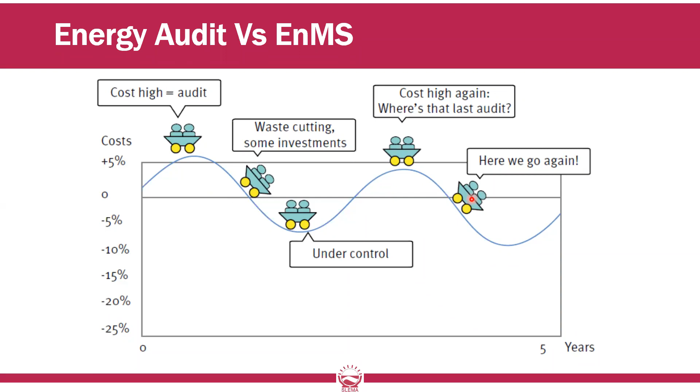Then if we see ENMS, energy management system, the start will be the same. So whenever they feel their industry is energy intensive and they pay a lot of money for energy, they start with what we call energy review, energy planning. That is different. We'll discuss later. That is a little bit different compared to an energy audit.

Then all given activities and recommendations are categorized depending on the investment and business priority for implementation. They implement selected activities. Then those are followed by monitoring and evaluation, so they will not lose the intended outcomes of implementation.

So they can improve their system continually. In the first 1 or 2 years they can implement low cost, no cost measures, then they go for high level investments, and later those things are done with the support of other internal departments like the HR department, procurement department, design, engineering, maintenance.

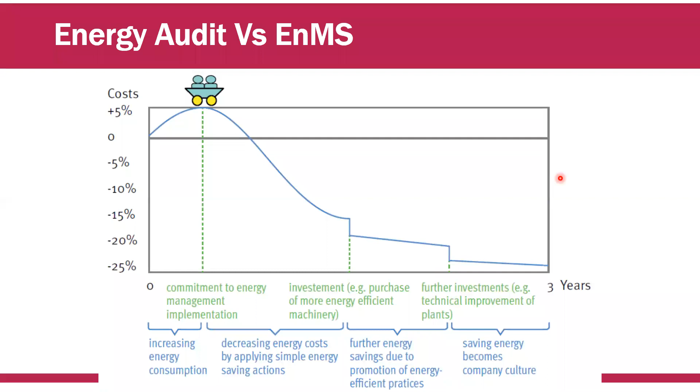That is continual improvement, and that is the difference between the ad hoc approach and continual improvement, which is supported by ENMS. And if we see the entire 50,000 family in a single picture, we are focusing on this 50001.

That is the document giving all requirements and guidelines for the energy management system, and it is supported by other documents like 50002, requirements and guidelines for energy audit, 50003 for application, 50006 for baseline, 50015 for measurement and verification. Likewise there are other supportive documents, but we are mainly focusing on the ISO 50001:2018 document. Within 10 minutes we will go through the entire document and see the main clauses and requirements.

Same as many other ISO systems, it follows the same clause structure, 10 main clauses, starting from scope and normative references, terms and definitions. These first three are basic formalities. Scope describes the scope of the ENMS document. Normative references: in ENMS, we don't have content in this chapter.

Terms and definitions: all terms and words used in ENMS are described and explained, because here we can see some differences compared to normal day-to-day wording. Energy use, energy consumption, energy performance indicators, significant energy users, variables, static factors are described a little differently. Then from chapter 4 the real system content starts, and continues to chapter 10.

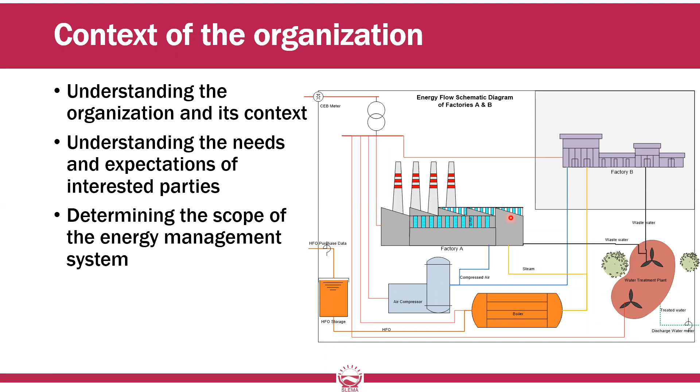And then the leadership. We can say compared to 2011, because ISO 50001 first release occurred in 2011 and the revision was released in 2018. Compared to the 2011 version, here we can see more weight to leadership. The commitment from the leadership is highlighted more than the 2011 version, and more responsibilities are given to leadership.

Because without commitment of the top management or leadership, we cannot continue, because these are long-term system implementations and take time to implement and also take time to stabilize. So continual support from top management is much needed. Support may be by means of providing required resources and giving authorities, likewise.

So that commitment can be demonstrated by publishing an energy policy for the company. That is the base foundation of the system. Then defining the energy management team and giving clear responsibilities to each and every team member. In such a way leaders can demonstrate their commitment, and that demonstration should be documented, and all required documentations are mentioned in the system document.

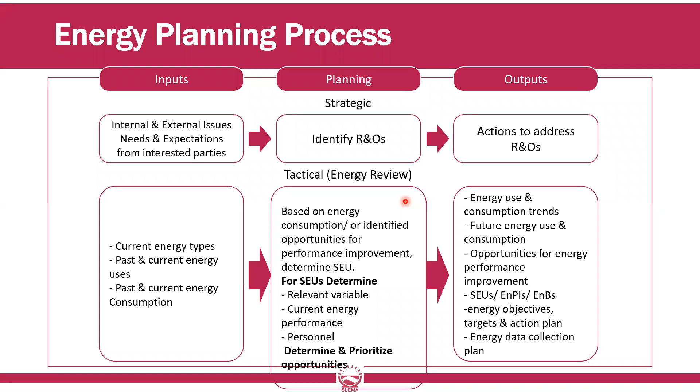Identifying significant energy users is very important, because most other activities are related to these significant energy users, not just identifying the machine, but its energy consumption, operator's competence, and the machine's operational control parameters. Like that, we go into more detail on each significant energy user. That is important. Then we need to define the energy baseline.

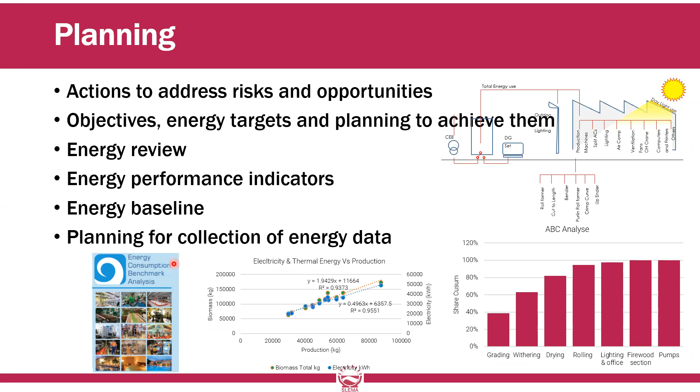These are some examples. As one output of energy planning, we need to develop an action plan. Just developing this action plan or activity list is not enough. We need to categorize or prioritize all activities. The companies are free to define their prioritization parameters, but they have to consider initial investment, ease of implementation, other benefits like environmental and social benefits, simple payback period, like that. They can define their own categorization or prioritization metrics.

So, for identifying energy saving opportunities or activities to improve energy efficiency, energy reviewers or the company can use inspection data, measured data, interview data, that kind of data. Then the planning phase is the phase which takes the most time in the system implementation.

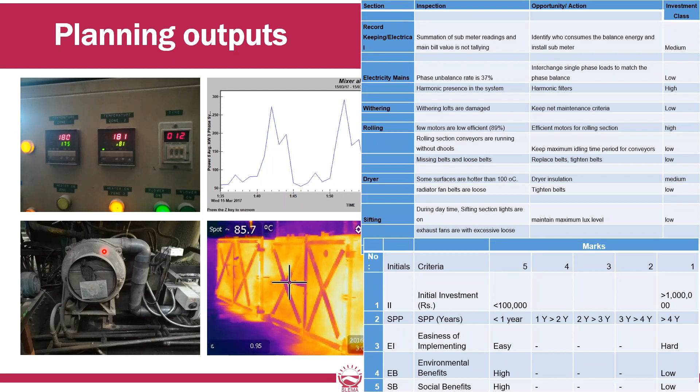Then we can move to the support phase. Support phase means that once implementation activities are identified, the company needs support from many departments to get the maximum benefit of that implementation. So we need to consider resources, maybe human resource, physical resource, financial resource.

Especially in human resource, we need to consider the competence level of employees, workers, and technicians and engineers who are engaging in activities of significant energy use. For most industries, we see boilers, air compressors, and some process equipment as significant energy users.

So we need to check whether the operator is competent enough to operate that significant energy user at adequate energy efficiency, because companies' intention is to operate the machine without failure and continue the production. So they forget about the energy efficiency, but the system requires you to check and set up the competence level. There are no legal requirements, but the company can start from somewhere and focus on something.

So maybe educational qualification can be defined as competence, and education plus experience and other professional certifications may be considered. Whatever competence is set should be met. If there are gaps, the company can send them for trainings like that. That is for competence.

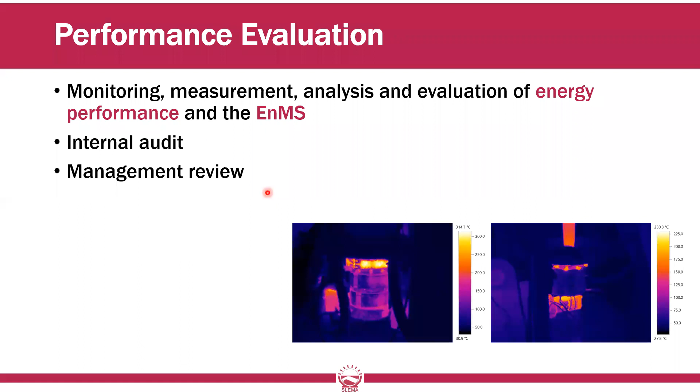So we do internal audit, and management review is the place where the engineering team gathers and discusses how we can do better. Then final is improvement. After internal audit and energy review, you get new options to improve the system. So you take all these considerations and continue this PDCA cycle, and ultimately you can get more benefits. That's all for EnMS system documents requirements.

Then we can see the benefits. Mainly we can save energy. That means we can save energy cost. In addition to cost, we can reduce the environmental impact like GHG reduction, and also we can reduce noise because.

We have lost your voice. Can you check your microphone? Hello. Hello. Can you hear me now? I can hear you, Rohan. Can others hear me? Can anyone please? Yes, everyone, go ahead. It's okay.

Okay now. So benefits: cost benefits, environment benefits, and social benefits. Simply we can categorize them. Then there are also legal benefits because we don't know when the regulatory bodies will impose new regulation for energy. So being ready is better. And for some sectors there are requirements from clients to implement EnMS. So this system will satisfy all these things: energy saving, cost saving, environment saving, legal and so on.

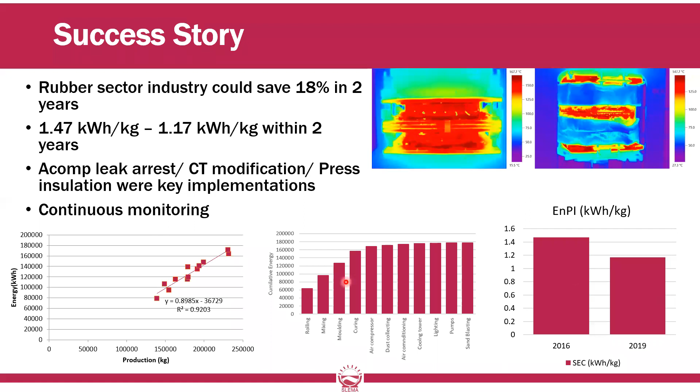So can you guess how many industries are certified for EnMS in Sri Lanka by now? The same year, 2011, it was introduced to Sri Lanka, and I could participate in the initial programs as well. Can anyone guess? You can put it in the chat box. How many industries are certified for EnMS? Can anyone give it?

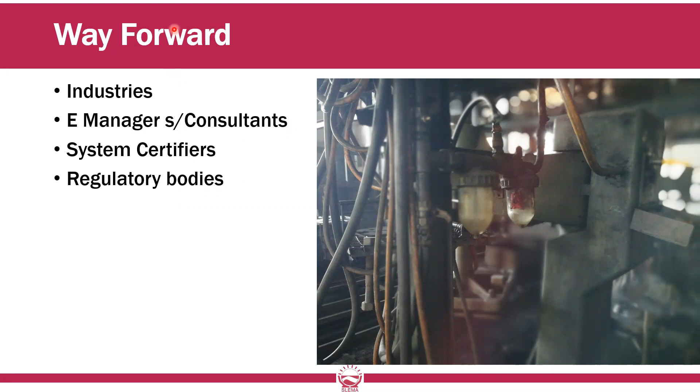The issue is actually the energy auditor. I have very seriously highlighted this during almost all of our past energy auditor training programs. It's a responsibility of the energy auditor or the energy audit proposing organization to recommend to the client organization not to stop at that point, but to take up ISO 50001 as well, and continue with the energy audit implementation plan as a continuation of their effort. So that will be the value.